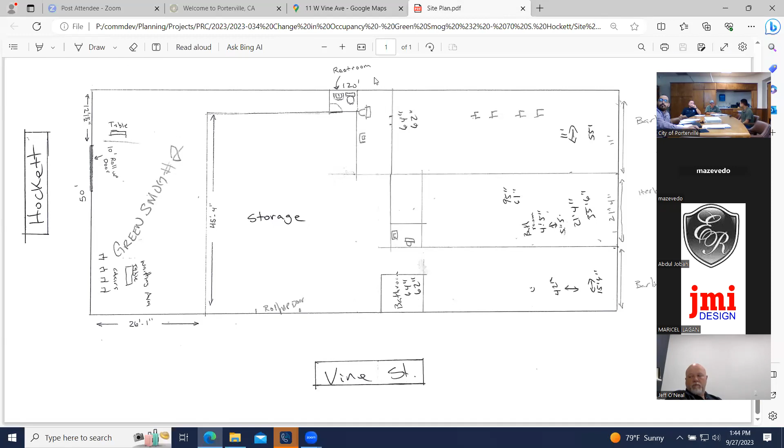Any modification would potentially require a permit. So the door would take a permit, yes, and if you're doing anything else, you just add it to the same permit. Okay.

And the storage area there, is that the other roll-up door? The other wall, that's the other tenant, that's from the Bower Supply Shop. That's all I have. Sounds good, thank you, James.

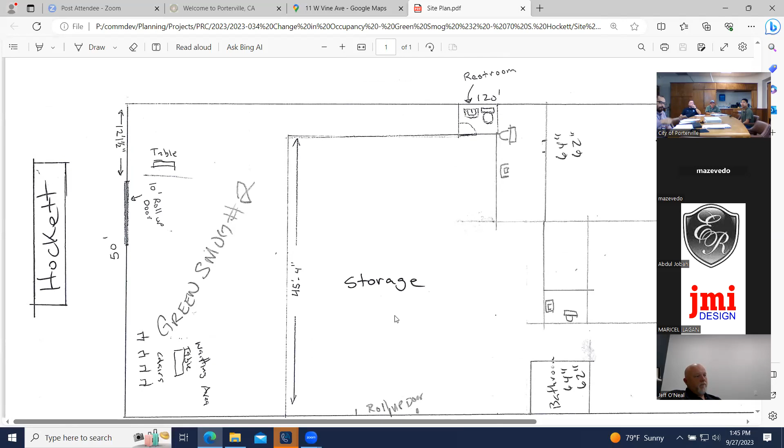Next with engineering, with Javier. So there's no construction going on, it's just moving in? Yes, sir. Yeah, so with that, engineering wouldn't have any comments.

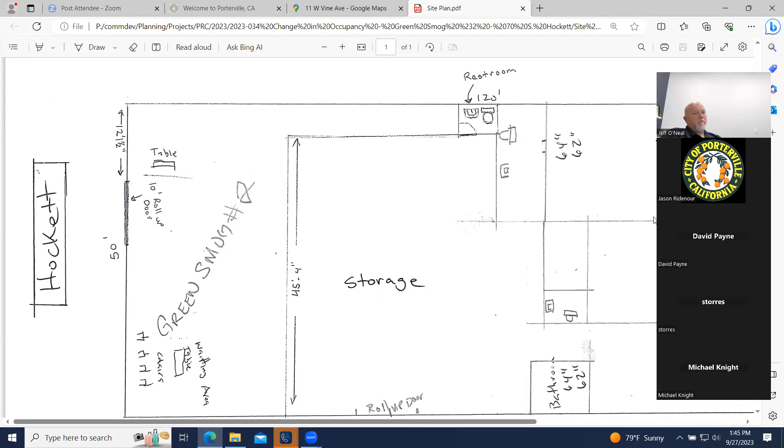Thank you, Javier. Thank you. Next with Michael. Sorry, I was on mute.

Just looking at the surface streets in regards to the back of the building, we'll definitely have to reach out and have a conversation with the property owner, since there seem to be 3 tenants in this one building, to address the trash enclosure or its location moving forward. We'll have to make sure nobody's generating any green waste, because the building without a waiver will require an organics bin, and it's currently not supplied with a recycle bin. The refuse superintendent will be reaching out to discuss service for the property, but it will require at minimum 2 bins with a waiver for organics generation. We'll reach out to you on that and look to see where we can house this trash enclosure or the bin location.

On the other side of that, I'm sure Dave will have a comment making sure this facility, in coordination with the other tenants, addresses how the water utility is being split and that the appropriate backflow preventers are in place for service on the property. That's all the comments I had.

Thank you, Michael. Any additional comments, with David? With regards to water, no, Mike covered the backflow, so I think we're good. Alright, thank you. Thank you.

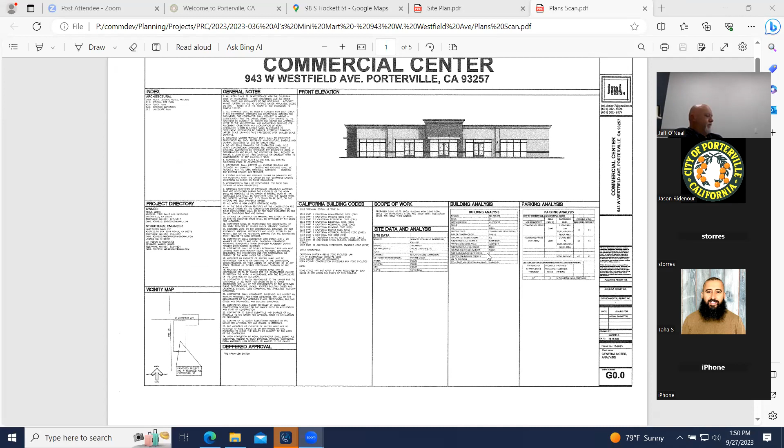So we'll start with planning comments. The subject site received a conditional use permit in 2019 for the establishment of the service station with alcohol sales. With the redevelopment of the property, it will require a modification of that conditional use permit, which will be a public hearing. There are fees associated with the modification. The modification fee for the conditional use permit is $150.

It will require an environmental assessment, in which we'll have an environmental coordinator make that determination, if it will require an initial study. Since it will require a public hearing, the notice will be sent or mailed to the properties adjacent to the project site at a 500-foot radius. The city can complete this service for the applicant for a fee of $26.50.

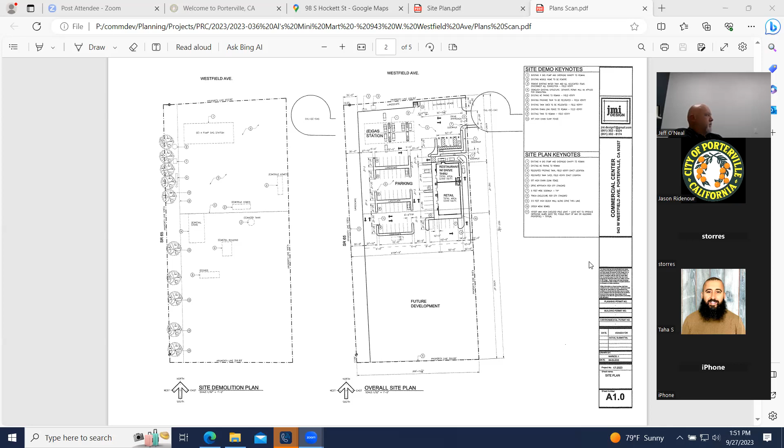As far as comments on the redevelopment, the service station is shown at 3,500 square feet, which does not exceed the maximum gross floor area for a service station. We do have one comment in relation to the drive-through facility. The zone district of neighborhood commercial does not permit a drive-through facility in conjunction with a restaurant.

So it is strictly prohibited, they did not allow the drive-through? Correct, the development code prohibits drive-through facilities in the neighborhood commercial zone district.

Other than that, the development looks like it complies with our development standards majorly. Of course, the landscaping would have to comply with our standards, no exception to that. As you guys know, for a restaurant, especially since we're gonna be reducing the size of the restaurant to 1,500 square feet, by the way, there's no exception to that, to be able to add a drive-through. Currently, our development code prohibits drive-through facilities in the zone district. It goes back to the development standards permitted or uses permitted within the neighborhood commercial.

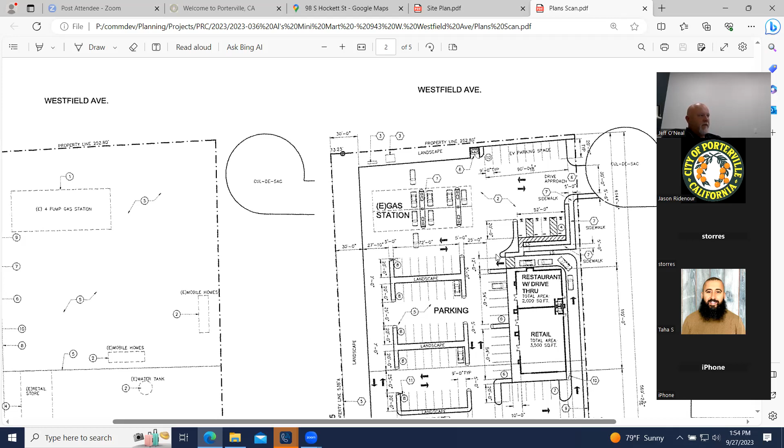So I guess we will have to submit that development code amendment and see if you guys will vote in favor. Well, it would be the city council voting in favor or against, not staff. Correct, and just to emphasize what Oscar was saying, all of the other commercial zone districts do allow drive-throughs, just this one does not. So that's with the understanding that what you just said could be used to help convince the city council to change the code.

There are already 3 other commercial districts outside of downtown, plus downtown districts, that already allow drive-throughs. It just so happens that the one that your property is located in does not. Just for clarification, but yes, you can certainly submit that and take your chance, and you could make those arguments on behalf of your application.

Okay, so let's say they don't approve it, and because we will not develop the restaurant without the drive-through, we won't do it. Let's say it's not approved, then we can go ahead and just build the C-store and the 3,500 square foot, and that's it.

I mean, yeah, you could go up to 5,000 square feet. That would be the maximum gross floor area for a service station in this zone district. But that could be an option. Yeah, for a service station, we won't do more than 35. It's just, it's a convenience store. That 5,000 is not necessary.

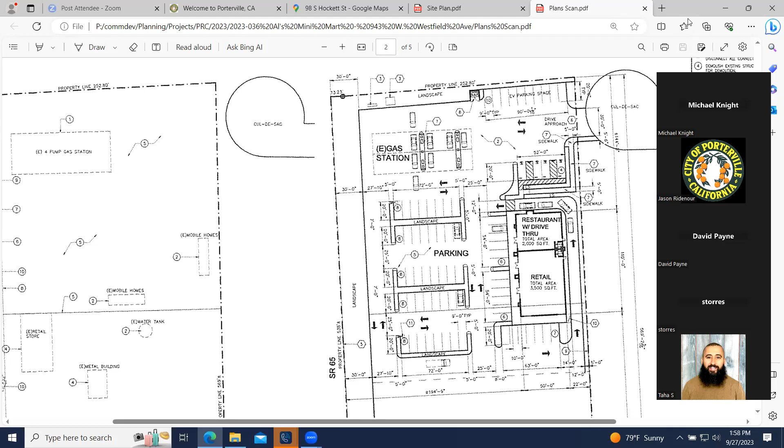My question for the fire department, where can we get the secondary access? That would not be something that I would propose. I don't design the projects. There are requirements in the code that the secondary access and the primary access be a minimum of half the diagonal distance apart, so your property is kind of stuck.

It really looks like some access roadway will need to be required from the south, potentially, just due to the fact that you are kind of stuck with - there's no overpass, yeah, it's not possible. Those are fourplexes, they look like fourplexes to me, or some apartment complex. Residential, yeah, residential, and no one was going to allow an easement through their property for access. Again, I don't design the projects, all I can tell you is what the code requires.

Okay, so what is the maximum square footage I can develop? Let's just say retail, neighborhood retail - the maximum square footage I can develop with only the current access that we have. I would say based on what Oscar stated, the 5,000 square feet currently permitted would be the threshold. So that is for the C-store.

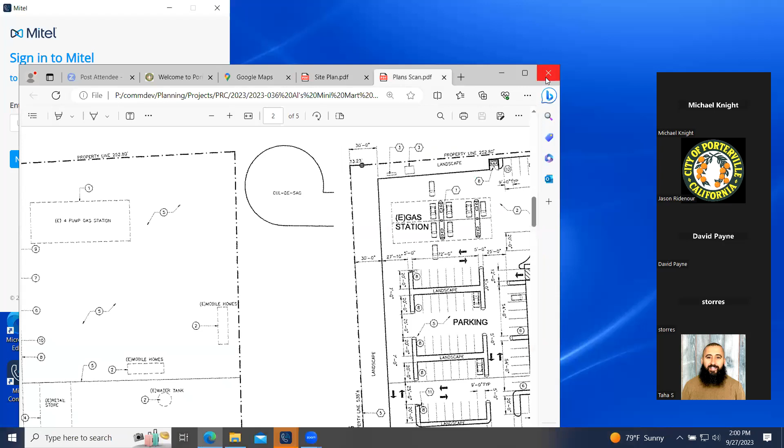So essentially what I'm saying is that what is there now and what you propose are close enough that I'll allow the existing non-conforming access. But if that project changes, then we have to comply with the code. Okay.

What you're proposing now on paper with us is not substantially larger than what is existing, and so I'm inclined to allow the existing non-conforming use because it's not going to necessarily increase the threat. But as we start increasing the volume of traffic, the number of buildings, and lot coverage, and the distance from the current entrance, that's where the secondary access triggers.

So what is the maximum retail building I can have on the site? 5,000 square feet, for the C-store. The zone district allows a 0.30 floor area ratio, but once you add more square footage, there's other codes that could be triggered.

Of course, each use may change as far as the allowable. We could provide you with our development code, and the zoning district and land use table after this meeting, so you could take a look at other uses and our development standards for a different project.

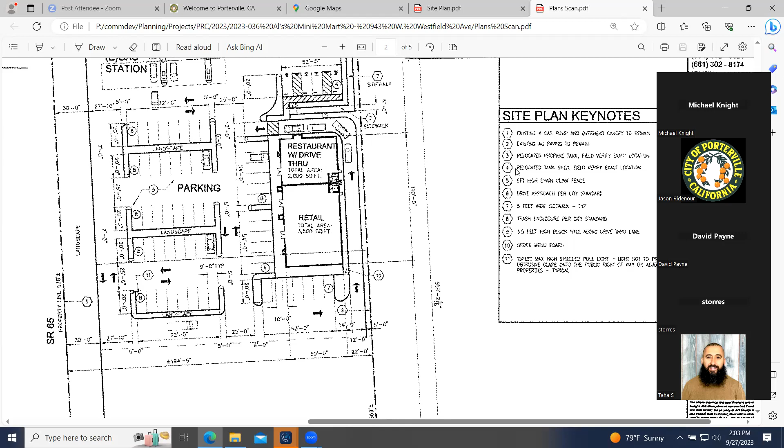So I guess we will just build a 1,500 square foot building. We'll submit for the drive-through, and if the drive-through is not allowed, then we'll just leave the 2,000 or 1,500 square foot building as a shell building until we find a tenant. So I'm going to go ahead and continue with the fire notes.

The project has to meet the minimum fire flow requirements for Appendix B of the California Fire Code. Depending on the location of existing fire hydrants and required fire flow, additional hydrants may be required. All hydrant locations shall be approved by the fire department. On-site fire hydrants and mains shall be provided where required by the fire code official. Fire hydrants located across a public street shall not be utilized for calculations or considered available to meet the fire flow and/or FDC connection requirement.

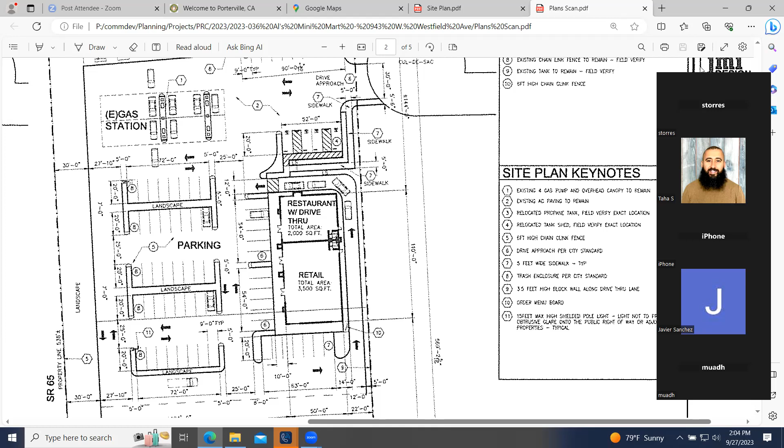No structure shall be greater than 400 feet from a hydrant. All hydrants must be in place and accepted by the fire department prior to any combustibles being brought on site. Fire hydrants are to be installed so as not to exceed 300 feet distance between hydrants. A UL 300 compliant suppression system is required for the restaurant if producing grease-laden vapors. NFPA 13 fire sprinkler plans and calculations are required for the structure. The FDC is required to be placed within 50 feet of a fire hydrant in an approved location.

Where conditions permit, the FDC is to be located no closer than 40 feet to the building. Where required, the PIV is also required to be at least 40 feet from the building. Fire sprinkler monitoring or fire alarm plans are required. If common driveways are 150 feet or greater in length from the public street, the fire department access road and required turnaround shall comply with the currently adopted edition of the California Fire Code. This will need to be shown and designated on the plans.

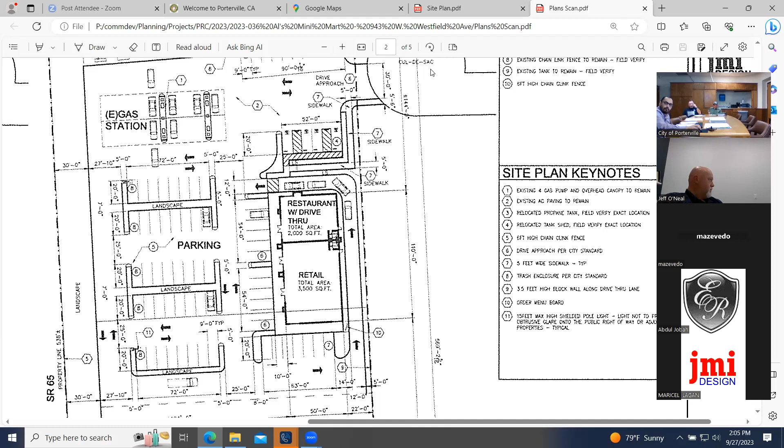What you show now, as long as those are a minimum of 20-foot roadways, as far as the proposal for the parking and that stuff, it does meet that. But as this project changes, this comment is in there just to keep in mind. The required fire apparatus access and turnaround signage and marking shall comply with Appendix D of the Fire Code and the California Vehicle Code, again maintaining the minimum of 20-foot roadways.

Address numbers posted on the building, visible from the street, and the numbers shall contrast with their background. Fire extinguishers shall be placed to comply with the currently adopted edition of the Fire Code, and Knox access is required for the buildings and any gates that are installed. There are no deferred items, and the fire department apparatus access roads are required to support a sustained load of 75,000 pounds and be all weather. So that's it for the fire comments.

Thank you, Clayton. Next, for the fire access, go ahead. Do we have to provide that in the back of the building?

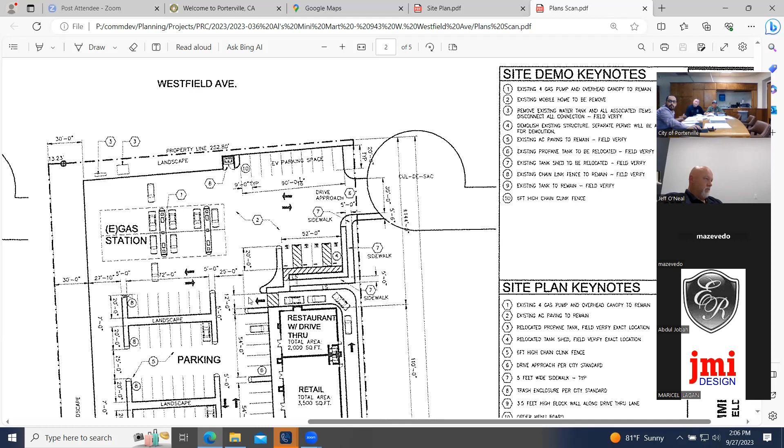So long as we can get around the building with 150 feet from the front, as we would lay a hose, then no. So if we can get to the center of the back of the building, if we park a fire engine on the front or on the side of the building, as long as we can access all sides from either one or two sides, then you don't need to put an access on the back.

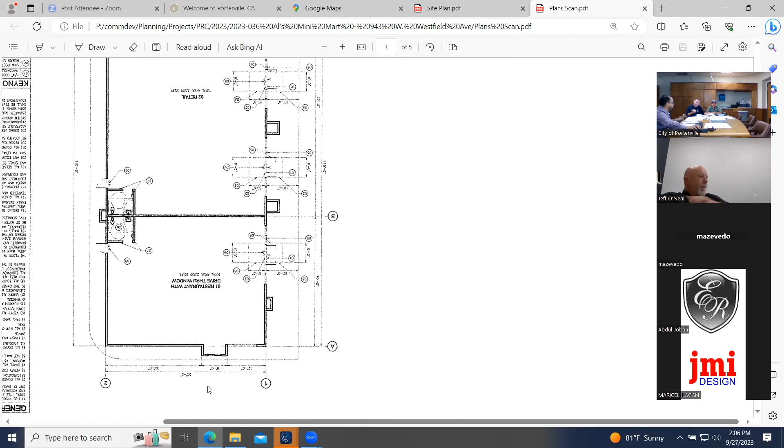52 wide buildings, yeah, it should be. It looks like it's sufficient, but when you do a plan submittal, at that point is when we would look at those measurements.

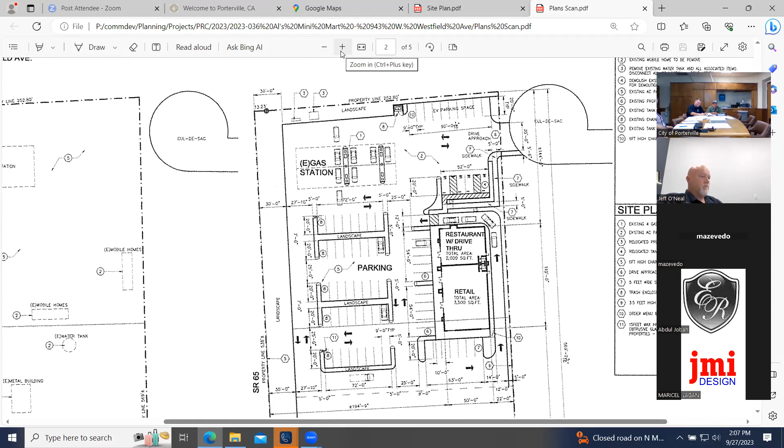So the only comments I would have today would be the two existing mobile home trailers are going away, correct? Correct. Okay, yeah, because those are not legal to even be there today.

I know we've had a lot of issues with them over the years. Yeah, so they're an eyesore to me. So they'll completely be removed. Yeah, they're not gonna remain there. That's good to hear.

So we would need a demo permit for the two trailers and the store. Now, the store, can that remain since not allowed to build anything? Because that could be used as storage.

And the two commercial, I mean, I can put a fence there but can that building remain as storage? As far as the fire department's concerned, I'm not here to negotiate, but what you proposed is the removal of the store and the addition.

If you are going to leave that store and add a new building, then you are going to be required to have a secondary access point. Gotcha.

Was a question possibly to utilize the existing building for storage only? Yes, it increases the size, it increases the fire load, that's the problem. Especially if it's gonna be used as storage, because you're gonna have fire loading inside of that building.

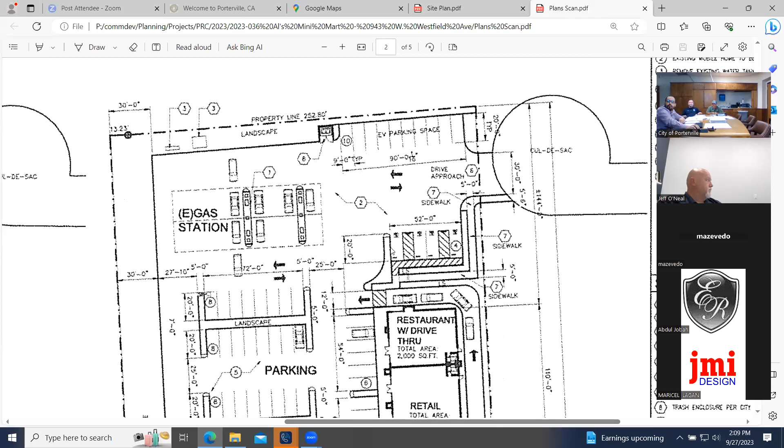So, going back to the demo permits, you would need demo permits and get clearance through San Joaquin Valley Air Pollution Control District. We work with the Bakersfield office for that, and I can provide the info for you in the letter that you will receive.

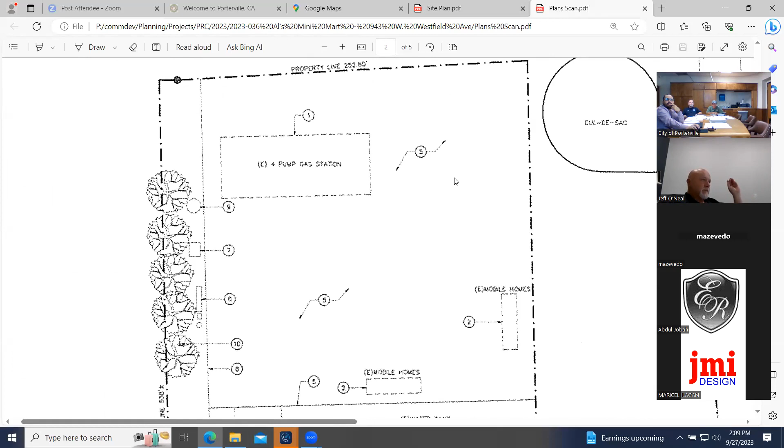And then I can provide the info on submitting plans, either paper or electronic, through the PRC comments that you will receive. Other than that, any other comments from me would come from the plan review process once plans are submitted.

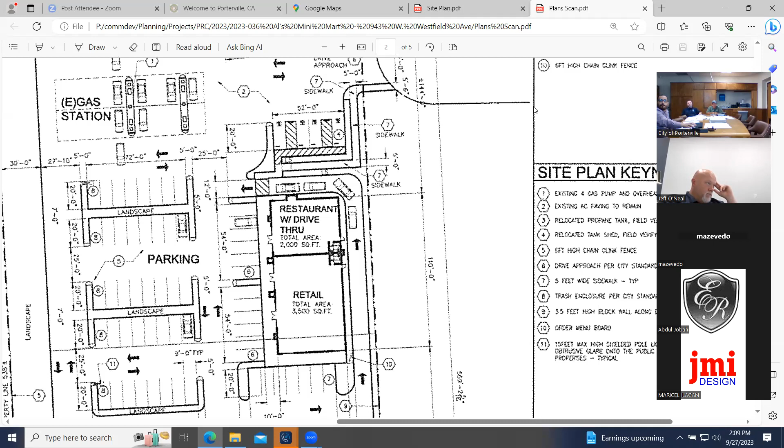Right, thanks, Oscar. For engineering, what we're looking for is a sidewalk path to this new developed area. Sidewalk, where at? From the street, from Westfield to this new developed area.

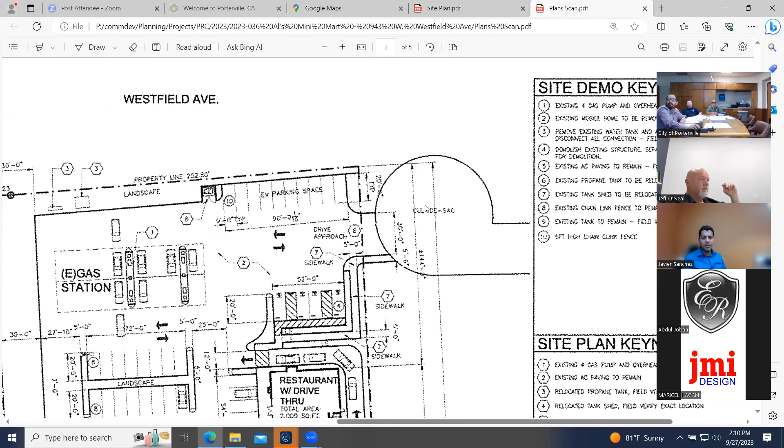So as you can see, on your development there the sidewalk gets extended to the bulb, but there isn't sidewalk from the bulb to the street to make that connection. So if you look at the site plan, there is 7.

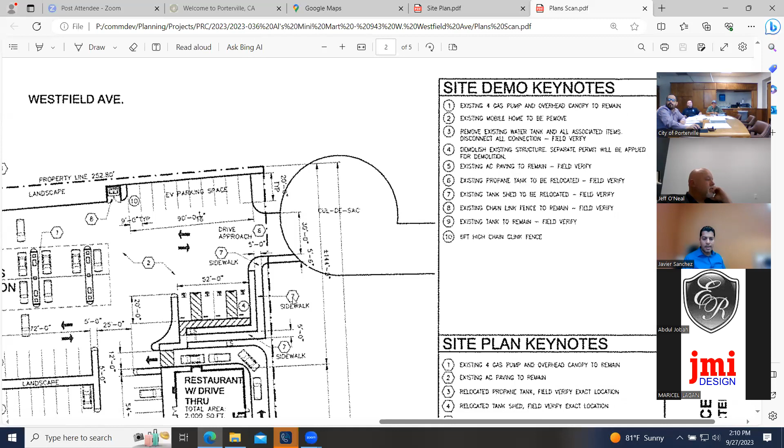The one with the hexagon. Go back on the site plan. Okay, so that's 7. That is all sidewalk that's from the street to the building.

Right, I see that, but if you look beyond, it doesn't extend to Westfield, which is where pedestrians would be coming from. Westfield is higher than the site.

So we will have to provide... are you guys requiring us to build a sidewalk from Westfield all the way to the property? Yes. That's gonna cost a lot. Yeah, it's gonna cost a lot.

That's just not... It becomes a point where it becomes not financially feasible for us, because the location is in a cul-de-sac lot, so even with a new development, the business is going to be minimal, and we're trying to improve that place.

So that's some requirements. I'll be honest with you, it would just be a deal breaker. We can't, we won't. Right, so it'll be based on the valuation. It just depends on how much your new development will be.

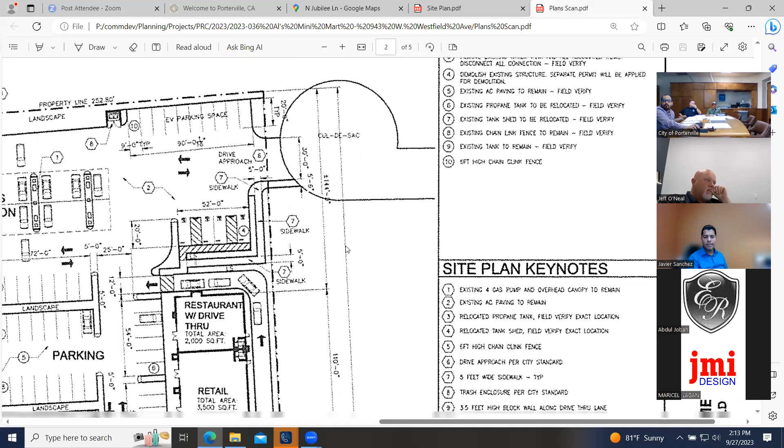Okay, so we don't want to be putting all these fees into this deal. I'd rather know right now if it's required or not.

Let's say the valuation is going to cost around $2 million to build the 5,500 square foot building, because we'll be reducing the parking now that you're saying that's the maximum building size I can have there. So we'll just meet the minimum parking spaces to save cost.

I need to contact a contractor. Can you show me again where, so we can at least have the square footage and I can contact a contractor and see how much it would cost to build a sidewalk?

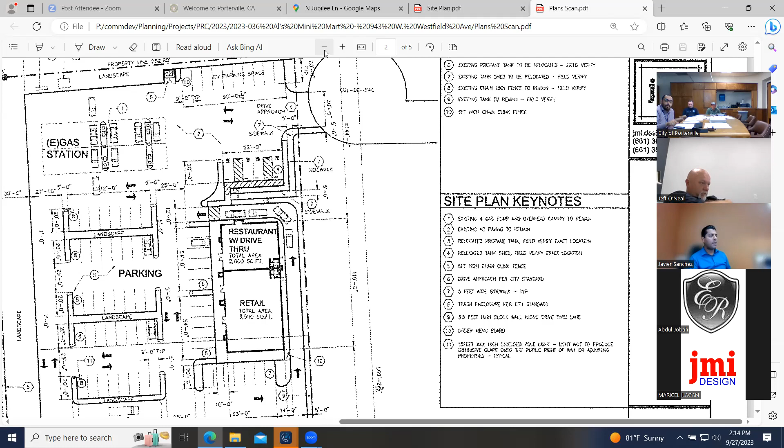Well, it just depends on the path you take. It could be along that walk path that's been formed there to the back of the return, or there's some sidewalk that exists there and extending that to the bulb, except there are palm trees up at the northeast corner that may be in the way.

Will the city allow a sign on that lot right there, so we can have visibility for Westfield? What type of sign are you proposing? Can you turn it on the north right here, on that area right there?

The development code does not allow off-site signage. Are you proposing a freestanding sign, or what would the question be? Yeah, a freestanding sign. Any signs associated with the development would have to be on site. There are sign standards which would be included in the letter sent to the applicant, outlining the sign standards for the zone district and what's permitted and what's not.

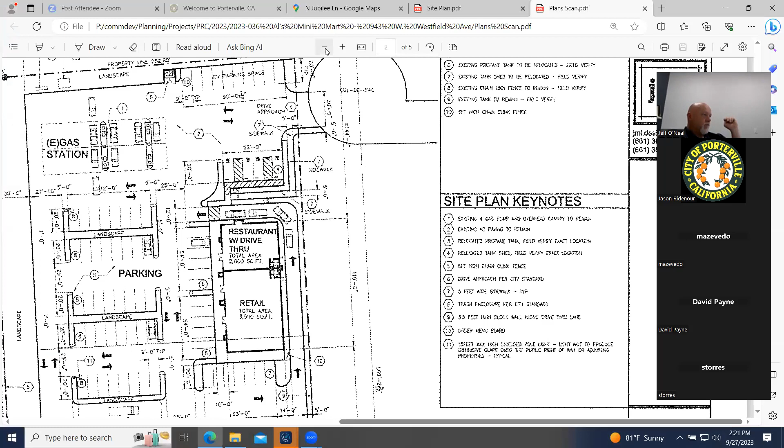Yes, thank you. So unfortunately, there's still more to consider here. Previously, back when the well failed, the existing store was fed with a 2-inch water service that comes all the way from the intersection of Westfield and that bulb area. You can see the backflow device that was located there. Can you throw the Google Earth map up real quick?

And again, we'll have to look at this during plan review and receive additional comments. But you will be having some issues with providing fire hydrants and fire protective measures for that facility as a result of its current capacity. And then with the modification of those services, have you guys had the well abandoned along the fence line on the west side of the property, the one that became contaminated? Or does it still exist? It's not my property right now, so I really don't know.

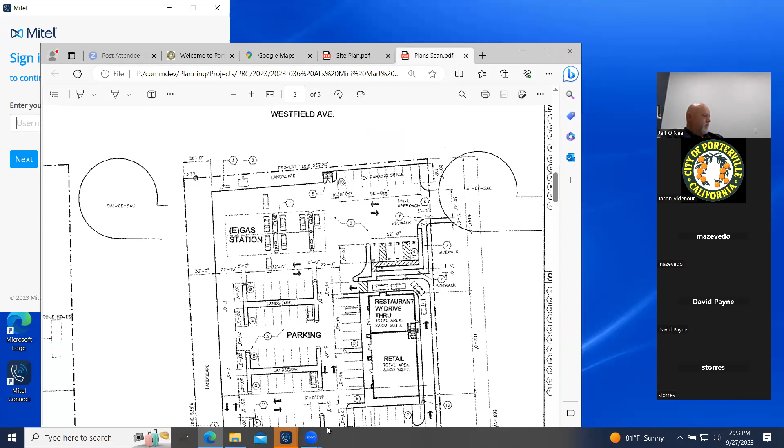I'm in escrow, we're in escrow, and that's why we're here—trying to make sure before we close escrow. So there is a well on the property. It already currently receives city water, but for this development, it will require improvements to the service that feeds this facility, which I'm sure you're already aware of. And if the well has not been abandoned, currently the well would need to be abandoned for that facility. So where the existing store is, just due west along the fence line is where that old well was located, just so that you're aware.

And then the business, again, with the modification of the water service, will require backflow preventers and meters for landscape and for domestic use. And it will require a 3-bin trash enclosure for organics recovery, recycling, and general waste. Happy to answer any questions, but that's all my comments.

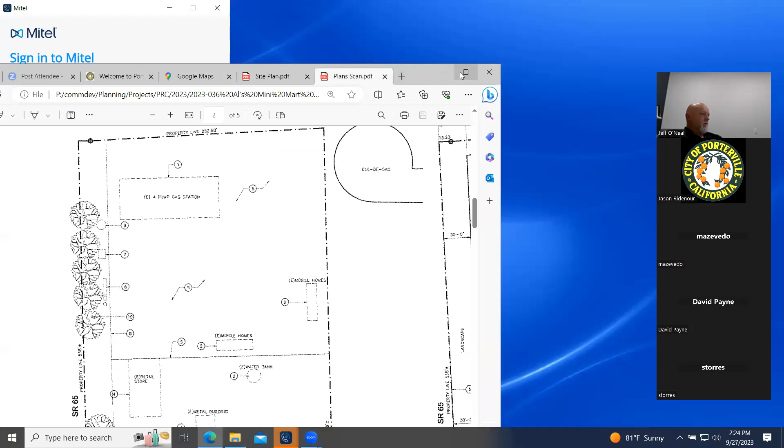Thank you, Michael. Next, with David—I don't have any comments at this time. Thank you. Next, with Mark, the police department—there are no comments from the police department.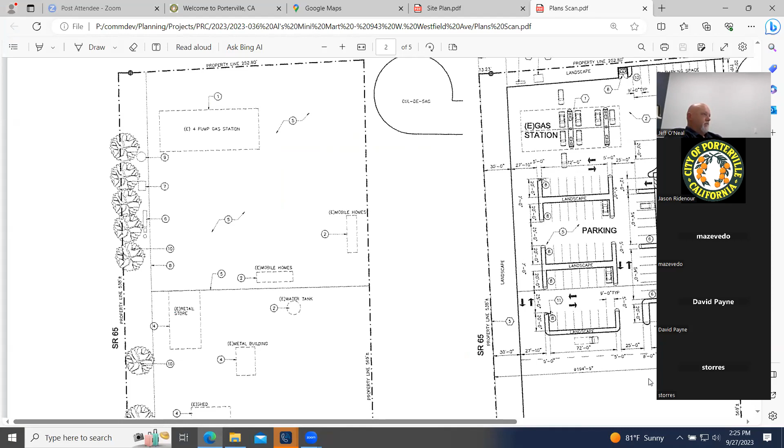Thank you. Just a question for the police department: any information on that store—has it, with crime, been robbed recently, or are you aware of that? I would have to go back and check, but off the top of my head, I can't think of any major crimes that have occurred there in a long time. The last robbery I could think of was several years ago, maybe 2017 or 2016, right around there. That's just off the top of my head.

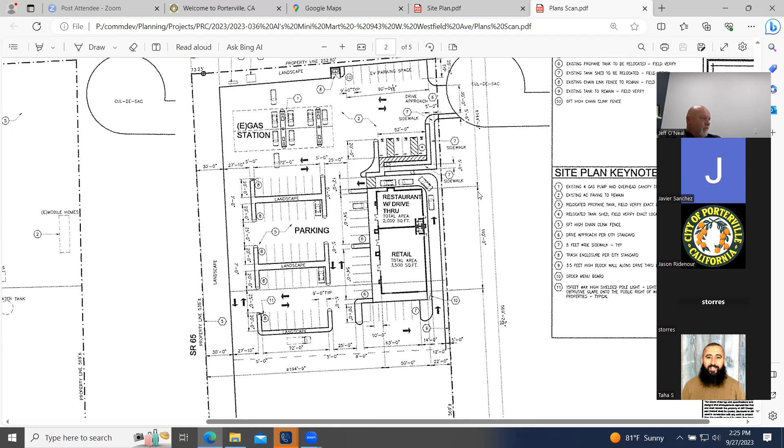I get propane there all the time. Thank you.

Looks like that's all comments from staff. Or James has a question with building—well, I thought I read somewhere that this is connected to a septic tank still? It is. It is? Yes, it's on private sewer.

Javier, they would need to tie into city sewer? Right, and then the abandonment would have to go through the county. Is there sewer there? Is it nearby? Yeah, I can share my screen if you want, Oscar. I got it pulled up. Yeah, go ahead, let me give you access.

Yeah, thankfully it's nearby. You've got two lines there that Mike will show. There's one that runs in the abutment of the overpass, and there's one that runs down the side of the property.

That may be a consideration as well to save money. I'll have to talk with the engineering department about that. Previously, the water service came all the way from this location, extending all the way over. It came in at an angle through the property and up to the store. But there may be an opportunity to get service from this side. We'd have to look at that.

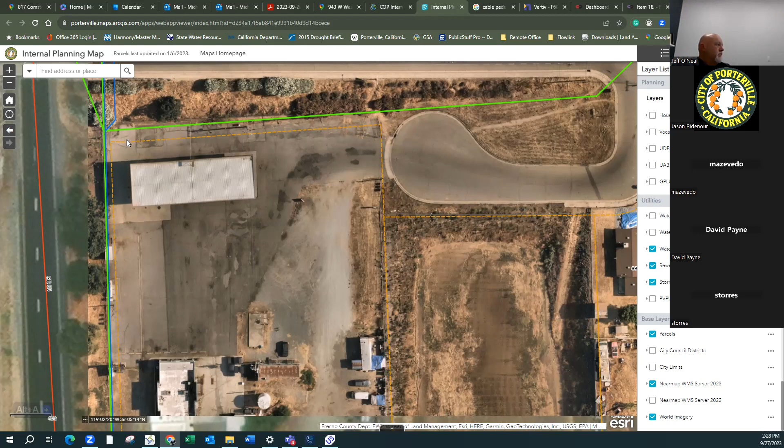But then again, like I was saying before, I believe that well is somewhere in this vicinity. No, the well is right here in the middle, that white tank. No, there. Is that it? No, that's a storage tank. I believe the actual groundwater well is somewhere in this area. So we'd have to look at that. So if we build a building there, it would be close to the sewer and the water.

Correct. Okay. Thank you, Michael. No problem. So, is there any other questions for staff from the applicant?

To follow up on Abdul's questions, can we build a building in the corner of 65 and Westfield in that area instead? Since it's adjacent to the state route, we will have to run this project with Caltrans to see how close you're able to get to their right of way also.

So if we meet the right of way, my question is with the planning department, can we build? Yeah, as long as you meet our minimum setbacks. But again, we would also have to run it through Caltrans, as they may have additional standards. We'll provide that information in the letter mailed out to the applicant.

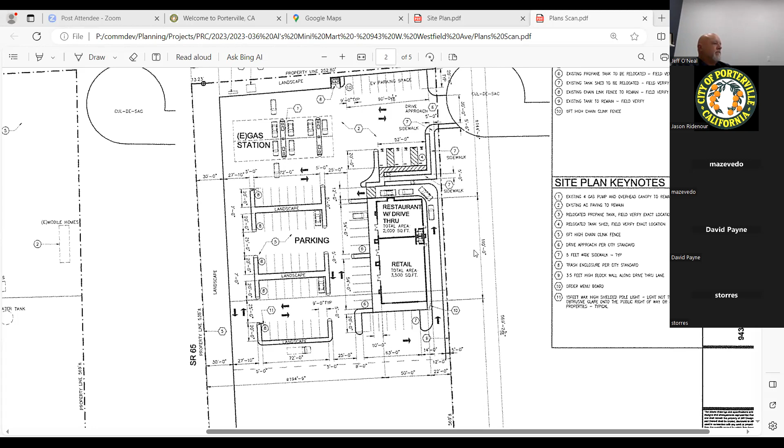And I'm open to discuss this as far as any proposed signage on your development. Okay, I have another question. The on-site drainage—since there's a sump next to our property, can we utilize that?

Yeah, the storm drain basin that's adjacent to the property—we'd have to provide the on-site drainage inside the property. Correct, you can drain into that. We can drain it into that one.

Can you scroll down further south?

If later one of these buildings go up for sale and we're able to purchase it in order to get access for future development, would that be allowed? Yeah, absolutely. From my standpoint, yes.

All I require depends on your proposal for your development. If you don't propose anything taller than 30 feet to the eave, then you only need a 20-foot access road. If you propose something higher than that, you need a 26-foot access road. So if you were able to acquire one of those and put in a 20-foot access roadway for secondary access, I'd be fine with it.

And it can be gated on that south end of your property. You can have a gate there with a Knox padlock. All we require is the access be installed, and that if it's coming across another property, it be recorded to protect it into the future through future development and future sales.